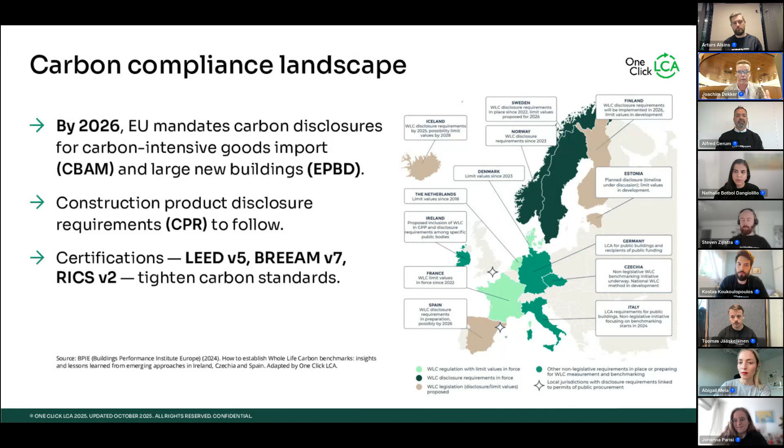One Click LCA offers a complete range of solutions to help you achieve and maintain compliance across every stage of your sustainability and reporting journey. One Click LCA is the world's largest lifecycle assessment platform, delivering impact, compliance, and growth in more than 170 countries. Our platform includes the most comprehensive global LCA database with over 500,000 datasets, and we are now serving customers across manufacturing, construction, infrastructure, chemicals, and manufacturing supply chains, among others.

One Click LCA is committed to powering 1 million makers of a zero carbon future by 2035, for an impact at planetary scale. So now, to show how our software turns compliance into an opportunity, I'll hand it over to our Chief Product Officer, Alfred. So over to you.

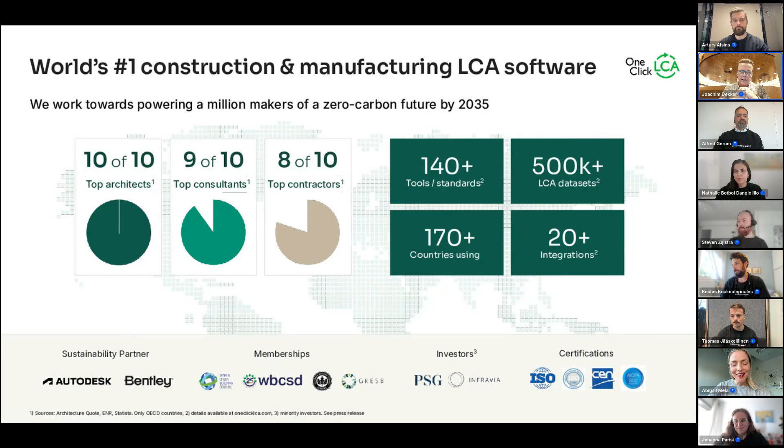When we speak about life cycle assessment, we often start from compliance, meeting regulations, reporting requirements. It's kind of checking the boxes. But when I think about it, the real opportunity begins when we move beyond compliance, when we turn data into strategy and that strategy into impact. And that is what really today is about.

It's about having those tools for every stage of your LCA workflow. Whether you're starting or scaling sustainability across your organization, you really need a solution that grows with you, that helps you connect those dots between reporting and real decision making.

So at One Click LCA, we built a platform to do just that, to make LCA not just a compliance exercise, but to be a strategic advantage. We don't want sustainability to slow down. It should really power the progress in the company to do these things.

What we also want is for the software to help you have success, and personal success too. We want our software to be of personal significance in your everyday work. We know it's a competitive market out there, and we want you to really have tools that you love to work with. So what we always think of is making our software powerful at the right time and very simple at the right place. And that means that much of your success with our software is our reward. That is what we think of in the product teams of One Click LCA.

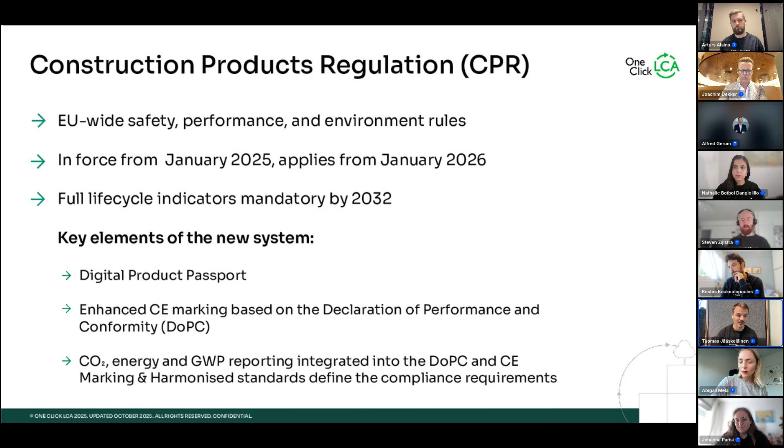Then the Carbon Border Adjustment Mechanism, or CBAM. It's the new EU carbon tariff on imported goods with high carbon footprint. Its goal is to prevent carbon leakage and ensure fair competition between European and non-European producers. Importers must buy CBAM certificates that match the amount of CO2 embedded in their product.

The principle is fairly simple: the higher the emission, the higher the cost. CBAM currently applies to cement, iron, steel, aluminium, fertilizer, electricity, and hydrogen, with more sectors likely to follow.

In effect, CBAM levels the playing field, but also sends a very clear message: every manufacturer inside and outside Europe will soon need verified carbon data to stay competitive. Even if you don't export to Europe today, now is the right time to start measuring and verifying your product emissions before the cost starts adding up.

Together, CPR and CBAM mark a turning point for manufacturers. Compliance is no longer optional, it is the foundation for market access. Digitalization, verified data, and scalable reporting will define who stays competitive in this new landscape.

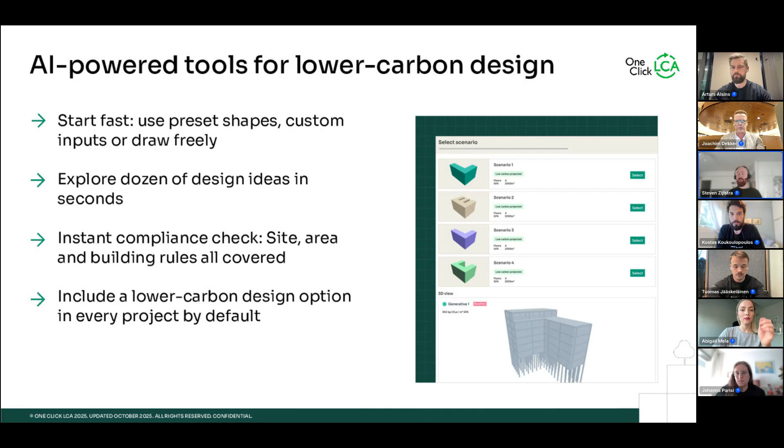Once you move into detailed design, accuracy and speed become critical. To support this, we have enhanced our IFC viewer so that you can bring project models directly into One Click LCA and work with them more intuitively. You can visually review the entire 3D model, zoom and filter on specific elements, and understand the structure before importing anything.

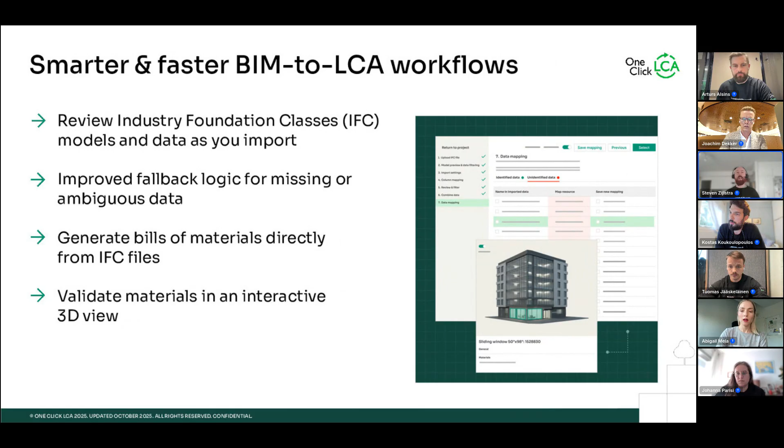From there, you can extract bills of materials instantly, removing the need for manual takeoffs. We've also improved the material mapping process with smarter fallback logic that automatically fills in gaps or mismatches during import, ensuring you can start with cleaner, more reliable data right away, while dramatically reducing manual corrections. In the end, the result is a faster, more streamlined BIM to LCA workflow that saves you time, improves accuracy, and helps teams move from design to assessment with minimal friction.

Selecting materials is one of the most important drivers of carbon performance, but finding the right data sets used to mean endless filtering, guessing different keywords, and comparing options manually. Now AI acts as your material expert. With our new LCA data assistant, you can simply ask natural language queries like low carbon concrete for slabs or local timber options.

And AI understands the context of your project. It instantly finds the most relevant data sets for you, and ranks them based on carbon performance and availability so that the best choices rise to the top.

You can also compare manufacturer EPDs with generic data side by side in one view, helping you understand trade-offs quickly. This saves you time, improves your decision making, and ensures that you always select the lowest carbon option with confidence. So in short, AI removes the complexity of material selection, and helps you make sustainable choices both faster and easier.

Once the assessment is complete, AI becomes your intelligent validator. It ensures your results are realistic and credible. The new plausibility checker uses data from thousands of similar projects in our Carbon Heroes database to predict expected value ranges across different elements. It automatically flags outliers, highlights inconsistencies, and suggests where results may be unrealistic. It then assigns a clear plausibility grade and provides explanations so you can understand exactly what needs attention.

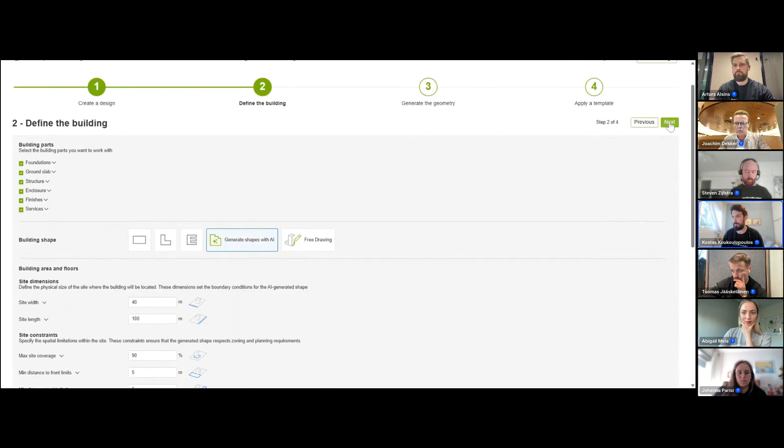Now this will take up to a minute. In the background, AI is generating a range of designs, and automatically it calculates a first version of the carbon footprint.

The more flexibility you give to the AI, the more variations it will create, and you have a bit more flexibility with how the different shapes look. If the constraints are too specific, you might get a bit more limited variation, more like box shapes or something like this.

Once the designs are generated, there will automatically be a new version that is low carbon projected. And now we are here. You can see I got 4 scenarios that vary with each other in some degree. I will pick the 4th one, I like it better. And I will continue, select.

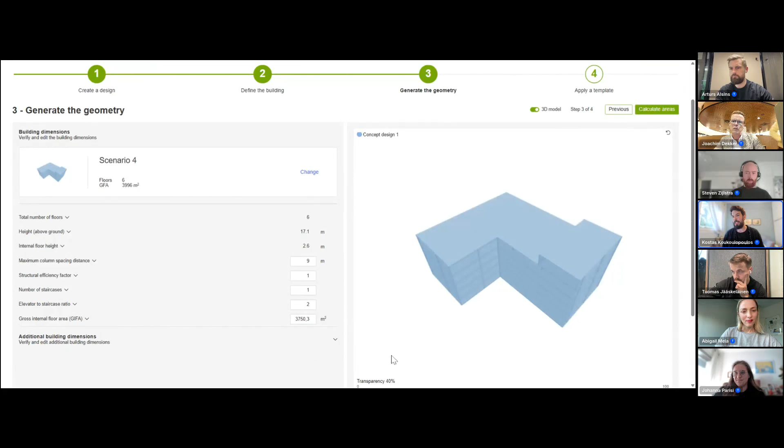Now in the next step, this is almost the same as earlier. The difference is that here you have a bit different parameters. I will continue, and you can see here all the different material quantities are generated.

These are building part quantities, to be more accurate. So you can see the building part quantities, play with a 3D model. As you can see, this is a bit simplified. You don't see every individual building element, but you see the overall shape.

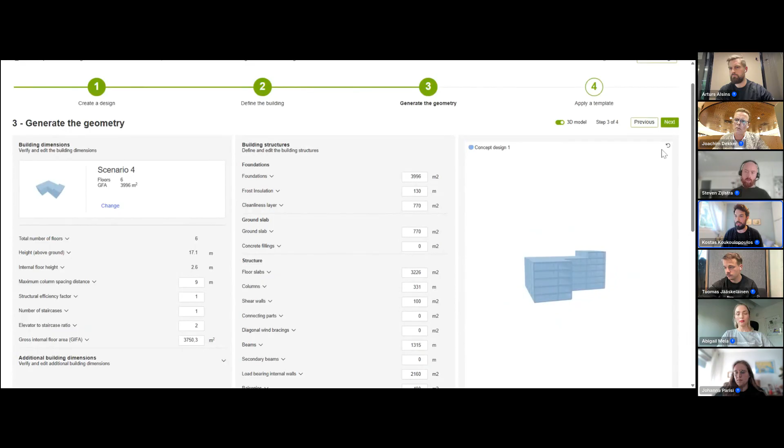I will continue next. But you can see the shape and the structure. By applying templates, you can further customize the setup and the different building parts, what type of constructions they include, how the walls will be, and so on.

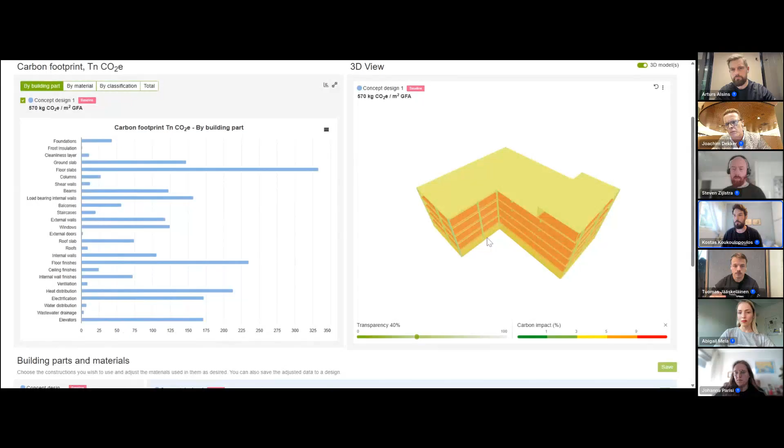And here I got the results. I got all the material quantities automatically, as you can see. I get to see the carbon view and the impact breakdown in a few ways, building part or material. And if I scroll more, you can see here the different individual building parts.

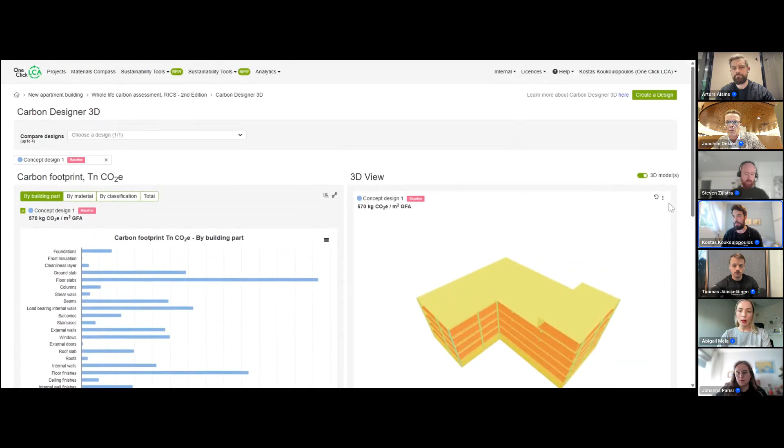If you wish, you can go to more details, see different options there, and pick between the different options. Or if you want, you can continue and add more. I can also save this as a regular design and get more advanced results, but I won't do it now.

Continue. Now I will generate a building with free drawing. So let's say Concept Design 2. We'll select again the UK region and continue. Now I will select free drawing.

I input in the beginning the floors, and then next I will move on. And so here I get to draw my building.

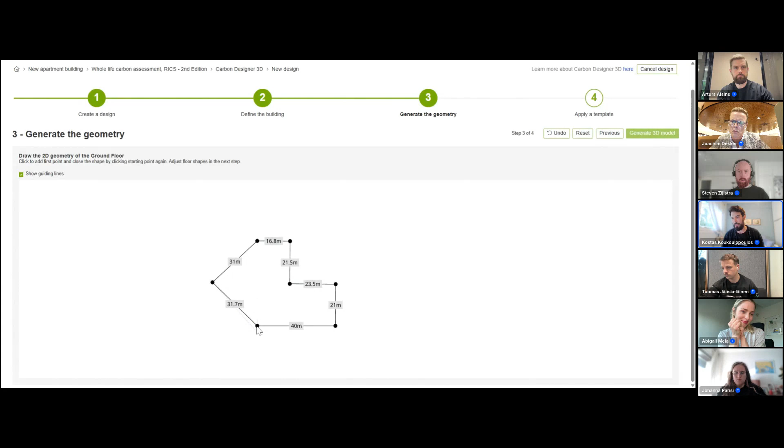I start, as you can see this in increments, like how the different quantities, the distance of my line, how many meters it corresponds to. As I draw, you can see there are different lines that help me draw parallel lines or intersect appropriately with others and snap to different points.

Now that the footprint of the building is ready, I get a 3D model and I can start adjusting individual floors.

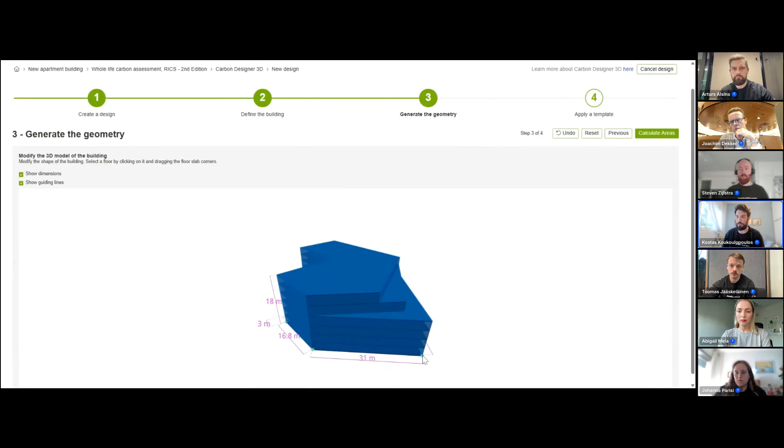So the first floor, the second floor, with a single click you select one floor, double click now - you see the whole building is moving. And now I got my building, and I will continue, and then everything is exactly the same.

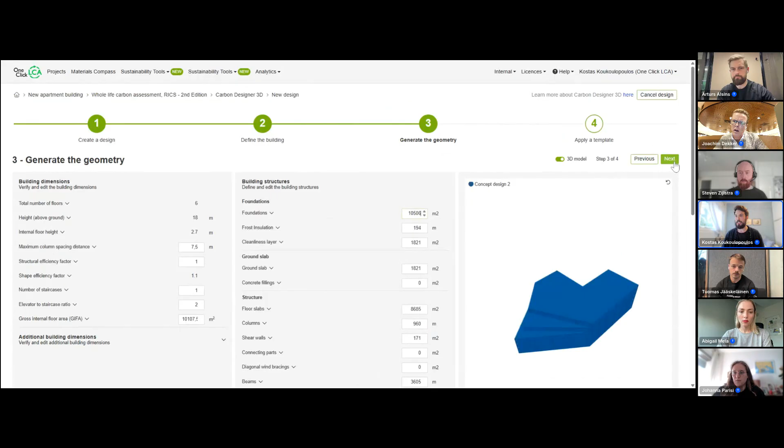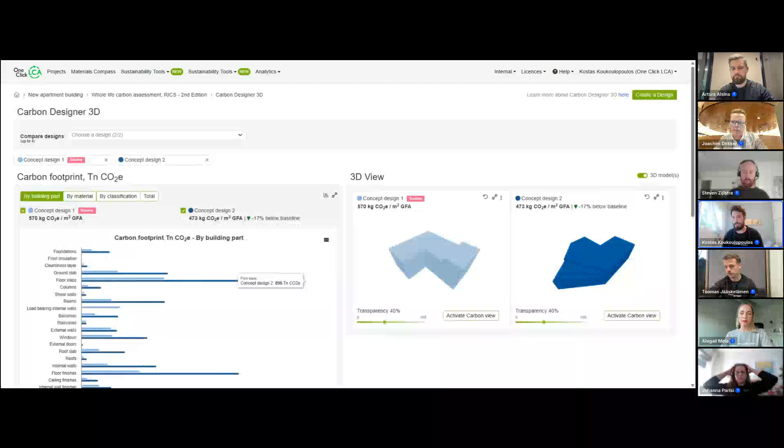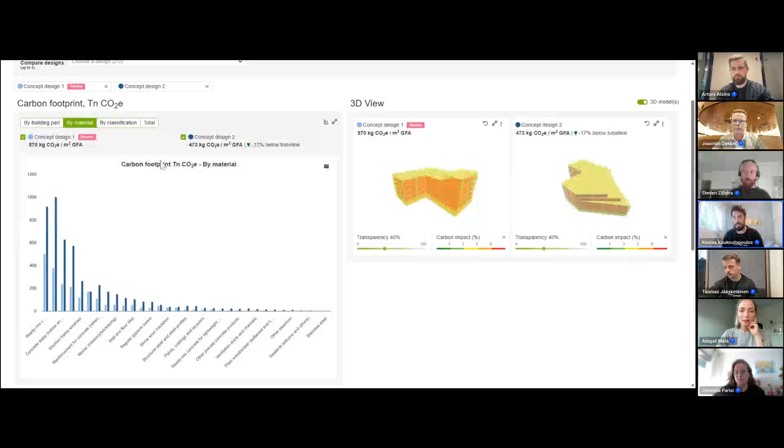So as you can see, in a few seconds I was able to draw my building and align it much better to the actual design I have in mind, getting accurate geometry and carbon footprint for my shape. I get the comparison here, I create more designs and keep comparing them with each other. And that's it with Carbon Designer.

Next, I will show you the new AI chat assistant very quickly. It's in the new data input interface, then under resource, then in search - you can see this option to ask the AI.

Here I will, for example, ask it to show me typical steel reinforcement in the UK. This will take a few seconds and return appropriate options, generic data, and average performing materials, and I can pick between them and add them.

That's the feature - I can add a couple of resources to the query, and that's it. As a note, all these features I showed you are Power Pack features, so feel free to try them out and share your feedback. Thank you very much, that's it from me.

Wow, thank you so much, Kostas, for the live demo - that was incredible. I'm sure everyone out there is very excited about what they saw today. Thank you also, Steven, for your overview, and we're about to get to the live question and answer segment of today's show.